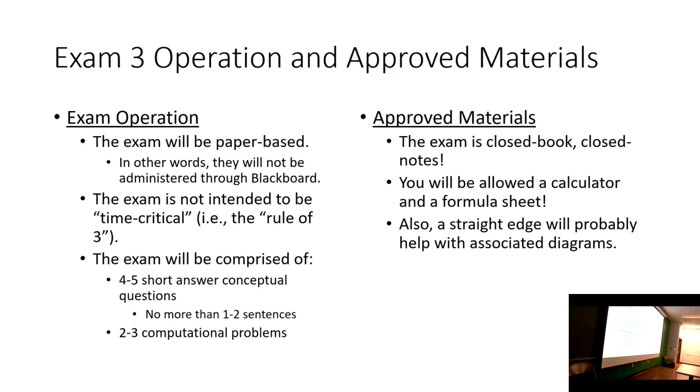Now, I want to make sure, and I'm really hammering this in about formula sheets, because we had a couple students on the last exam that didn't quite follow this, and I didn't make a big deal out of it, but I really want to enforce this now. You can bring a formula sheet, you can put whatever you want on it with the following stipulations, and the last one is the one I really want to talk about here.

First off, make sure you have your name on it, because I'm going to collect them all after the exam. You do not need to copy down necessary property tables, and I'll show you what I mean. For example, this table I'm giving you on the exam. I'm giving it to you, so you do not need to waste time on your formula sheet with this, because I'm actually giving you this table on the last page of the exam.

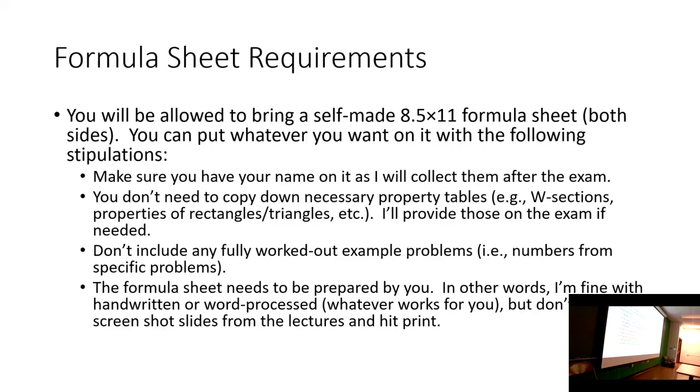Don't include any fully worked out problems. That really wasn't a big deal, but this last one is probably the one I really want to focus on. I want you to make the formula sheet. We had a few of you that just took the slides, snapped them into a Word document and hit print. It needs to be prepared by you. I don't care if you word process it, I don't care if you snap an image here and there from the slideshow, but actually take the time and make it, synthesize the information into something that makes sense for you.

Okay, let's talk about the topics on the exam. Really, this is it. This is it in a nutshell.

As I mentioned, my exams are not intended to be comprehensive—the first 3 exams in the class are not. In order to solve a truss or draw a shear and moment diagram, you do need to be able to compute support reactions, and I know that was on a previous exam. There's no real way of getting around that. But I'm not going through particle statics or R cross F or anything like that, because we haven't talked about that since the second exam.

What I want you to be able to do on this exam—first off, let's talk about centroids. Make sure that you can locate the centroid of a line, an area, or a volume. That's pretty much it in a nutshell. And make sure that you can compute the moment of inertia. If you can do those two, you're rocking and rolling.

You're good to go. I'll go ahead and tell you, because I'm sure I'll get this question during the review session: I am not going to make you break out the integrals and start deriving formulas for shapes. I'm not going to make you do that, so don't worry about it. That doesn't mean you don't need to be able to use the references you see here, but I'm not going to make you do the calculus-based derivation. I'll go ahead and tell you right now, I'm not going to worry about it.

The other main topic we've been talking about for the past few lectures is the analysis of structures. We've really been focused on two classes of structures: the first are trusses and the second are beams. Now for either of those, you do need to be able to compute support reactions. You can't analyze a truss or draw a shear and moment diagram without being able to compute a support reaction. So you do need to be able to do that.

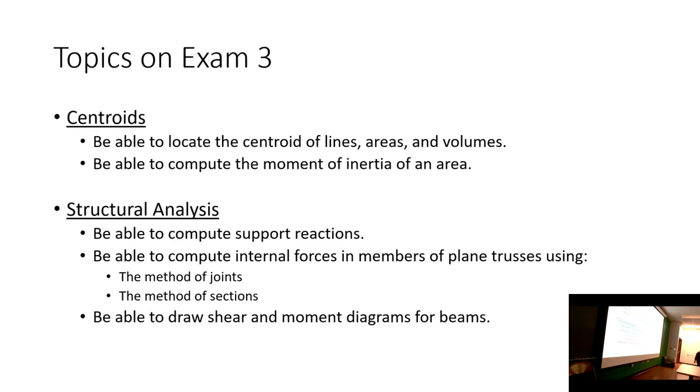And finally, be able to draw shear and moment diagrams. If you can do all that, you're good on exam 3. Now, in terms of the concepts...

We do know that, so I am going to ask you conceptual questions. Make sure that you understand that if we integrate a region, we get an area, but if we integrate x times a region, that is the first moment of area, or x squared, that's the second moment of area, and so on and so forth. The second moment of area has a very special name—we call that the moment of inertia.

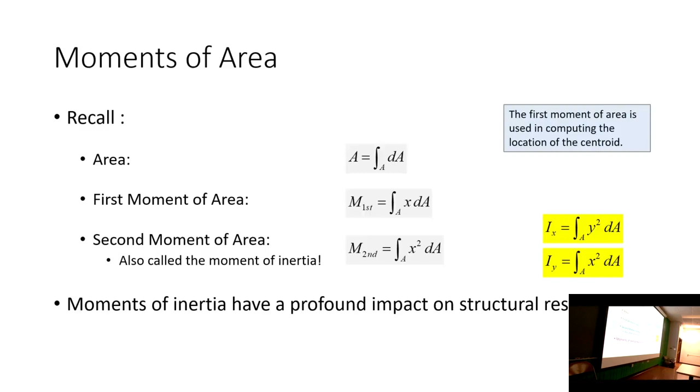And remember the subscripts are flipped—that's not a mistake, that's on purpose, because the distance from the x-axis is called y, and the distance from the y-axis is called x. The first moment of area is useful in computing the location of the centroid, because if you take this integral and divide it by the area, that tells you where x bar is.

You do need to be able to use these. Okay, so I'm going to give you this right here—I'm giving you this on the exam. This table right here, so it's the last page on the exam. This list isn't complete; you have a more comprehensive list in your textbook and in the FE reference manual, but I'll go ahead and tell you, you're not going to get asked any centroid questions beyond what's on this.

I do not want you to waste time on your formula sheet littering it with stuff like this and stuff like this. Any of these formulas that you need, you will have. Okay, point blank.

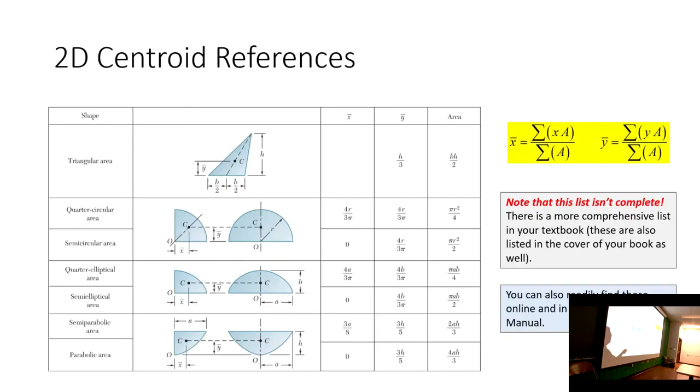But you do need to make sure that you understand how to use them, and by use them, I mean understand how to compute the centroid of an area, or the centroid of a volume, or the centroid of a line segment. You do need to be able to compute the moment of inertia of a composite shape.

And so in order to do that, we utilize the parallel axis theorem. The parallel axis theorem states that if I want the moment of inertia of a composite shape, I sum up these terms for all the simple shapes, and these terms are the centroidal moment of inertia of each simple shape plus A D squared.

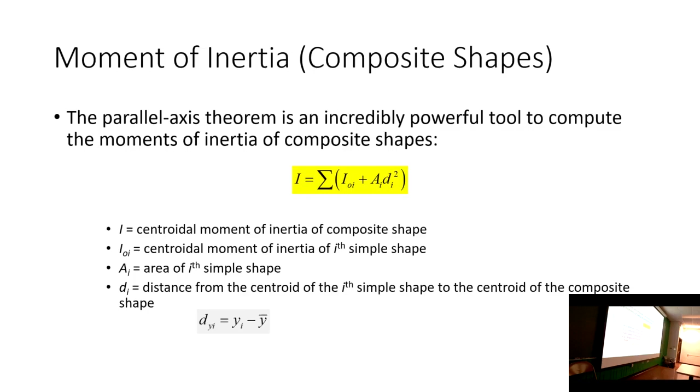A being the area of that shape, and D being the distance from the centroid of that simple shape to the centroid of the whole thing. That one's really easy to compute because you just take y minus y bar for the shape in question. So it's just a big algorithm, but I don't think it should be that difficult, it just takes a little bit of time.

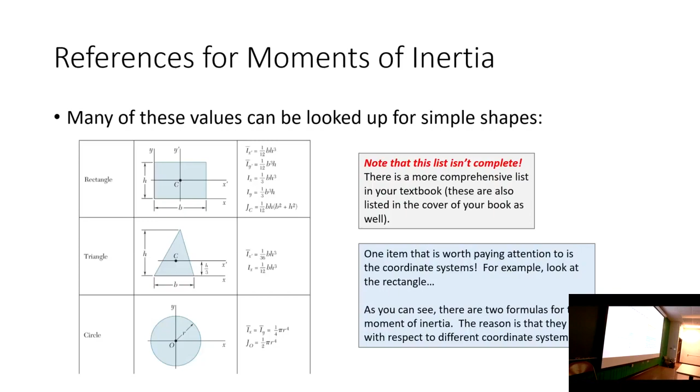If you need these formulas, I will give them to you. There's a page in the back of the exam that has a host of reference formulas like that you'll need on the exam.

For truss analysis, we have the method of joints and the method of sections. The method of joints is a concurrent force system problem, meaning all the forces meet at a common point. So you're only afforded two equations of equilibrium when assessing a joint, meaning you can only solve joints where there are at most two unknowns.

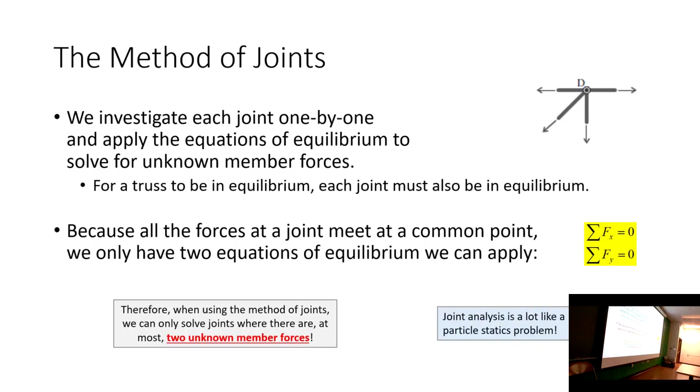Whereas with the method of sections, you can cut a section that has at most three unknown member forces, because now we have a non-concurrent force system, which gives us a third equation of equilibrium we can use to solve these members. The method of sections is more advantageous for spot checking or determining forces in a given member, whereas the method of joints will help you with the whole truss.

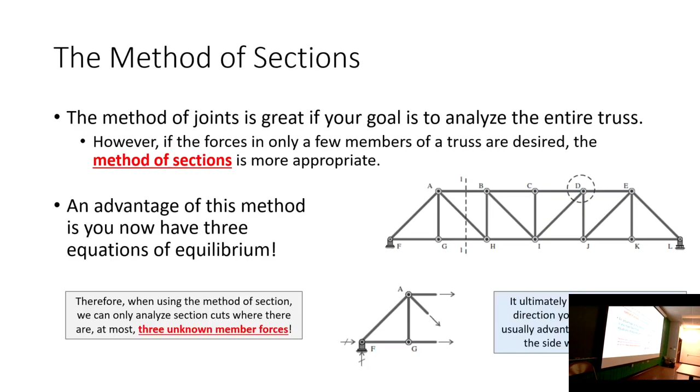Finally, we have our shear and moment relationships. We know that the relationship between load, shears, and moments can be defined from a differential or integral basis. So if I have the load diagram and integrate it, I get the shear diagram. And if I have the shear diagram and integrate that, I get the moment diagram.

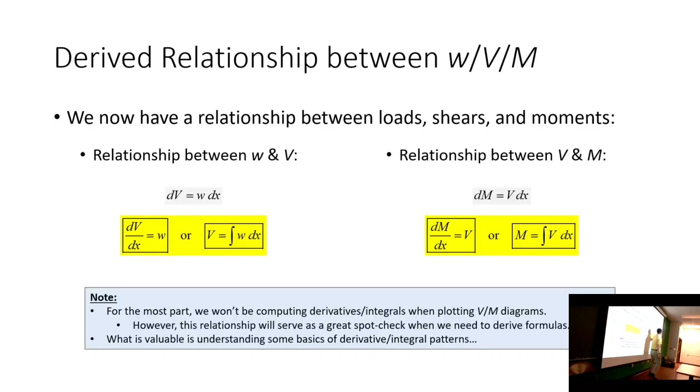But probably what's more useful to us as engineers are the conclusions from our graphical approach. When we have our load diagram, the first thing we need to do is construct the shear diagram. At any given point, the slope on the shear diagram equals whatever the load is. So if we have a beam with a bunch of point loads, the shear diagram looks like a big stair step, because between the point loads there is no load, so the slope of the shear diagram is 0 - that's why it's just a bunch of horizontal lines like a stair step.

Between two points, the change in shear is equal to the magnitude of load between those two points. That's another reason we had a stair step approach for point loads - between those two loads there's nothing on the beam, so there's no change in shear.

Between shear and moment, you've got to integrate the shear diagram to construct the moment diagram. For the beams we're looking at here, we're largely just using a graphical approach - our shear diagram is just a bunch of rectangles, triangles, and maybe some trapezoids, so we don't need to break out the integrals to compute the area under the shear diagram because the shapes are pretty easy.

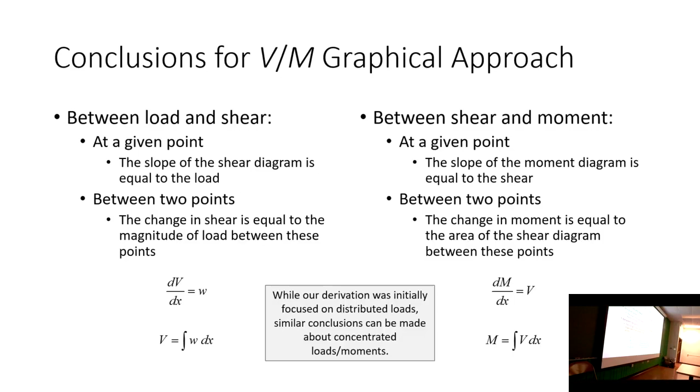Keep in mind that the slope of the moment diagram is equal to the shear at any given point, and between any two points, the change in moment is the area of the shear diagram. That's where we had derived these graphical relationships.

This is what we have for concentrated forces. Whenever you're drawing the shear and moment diagram and you have a concentrated force, that force is going to cause a jump in your shear diagram. So you had a shear here and you jump to another shear, and the magnitude of that jump is equal to the magnitude of that load.

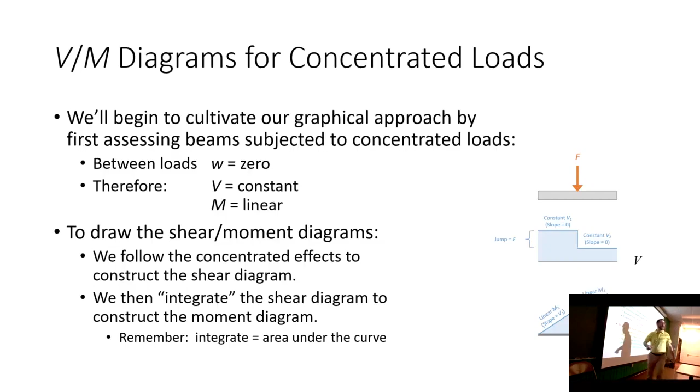You have two shear diagram regions of 0 slope because there's no load there. But we have a constant shear here and here, so a constant slope here and here - that's why we go from constant to linear, and that's why we have a slope change right where the load is, because we have a value change on the shear diagram. For distributed loads, we go one level higher.

So if we go from load to constant to linear, now we go from load to linear to parabolic. We have our constant load, and that constant value determines the constant slope of the shear diagram, so we have a linear shear diagram. We go from a high shear region to a low shear region in this example, so we go from a high slope region to a low slope region on the moment diagram. That total change in moment between those two points is equal to the area under the shear diagram curve.

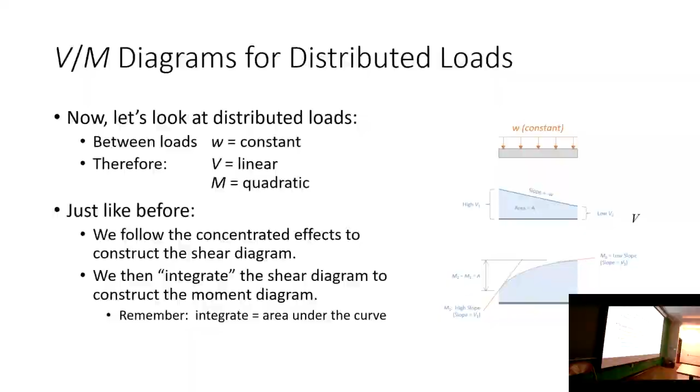And that's exam 3. Okay, so with that, I'm going to stop for a sec and see if you all have any questions. I made a post on Teams yesterday, and I said come prepared with questions. So with that, the floor is yours. What questions do you have for exam 3?

Are you ready to just get this thing over with? Are a lot of people ready to do that? Let me ask you this: is there any one topic of these three that you feel least sure about? Trusses, beams, or centroids? Which one are you feeling the most fuzzy about? I'm curious, and if so, why?

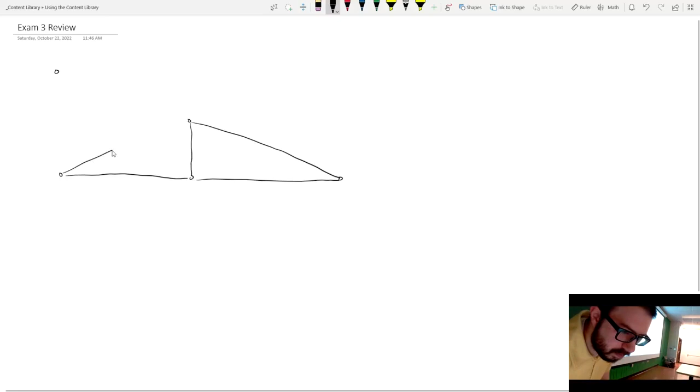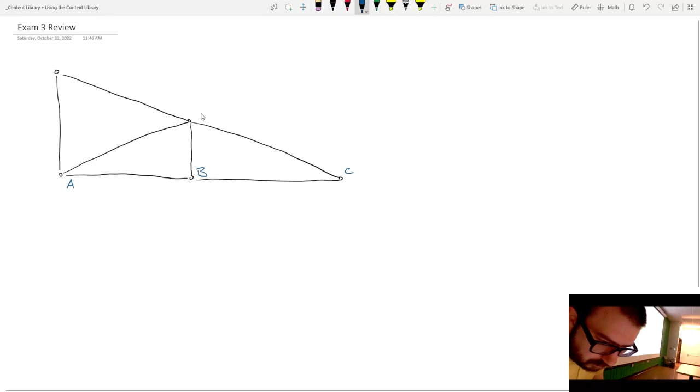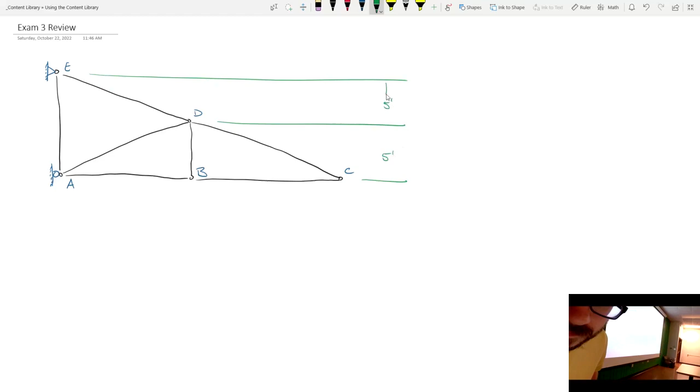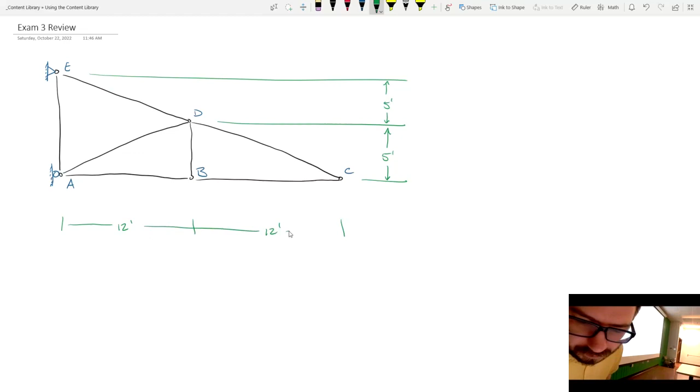So I have a truss here that looks like this, and we're going to say that that's 5 feet, and this is 12 feet. This truss has 10 kips of applied load on these two joints, and the question is to solve the truss.

First thing I'm going to do is move this over a little bit. So we're going to solve this truss, and I'm going to show you maybe a different way. Let me be clear, I don't think this is all that different — I think we're still using the method of joints like before, but maybe organizing it a little differently.

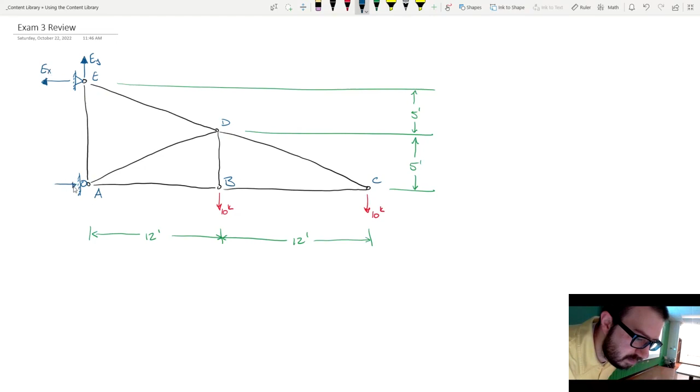This truss is cantilevered, so we've got reactions going this way and up and down. First I'm going to recognize the direction of my reactions. Because this is cantilevered, the order in which we solve for our reactions is going to be a little different. I'm going to call this EY, this EX, and this AX.

Now I want to say something right now. If you look at this truss and think, okay, the only unknowns in the horizontal are these two, so they must be zero — I want you to stick out your hand and stop, because that's wrong. These two do not equal zero; their sum equals zero. They could very easily have value, and in fact they do in this problem. I'll show you what I mean here in a second.

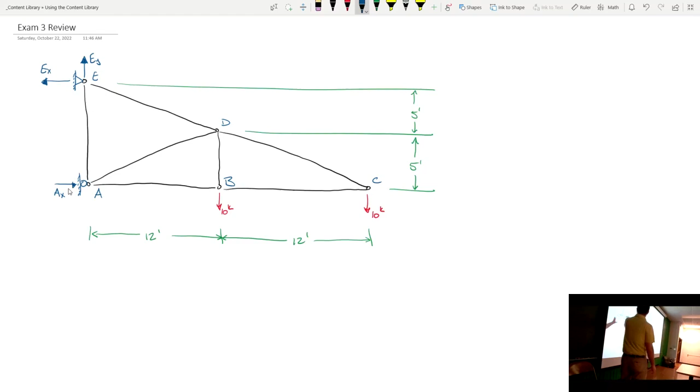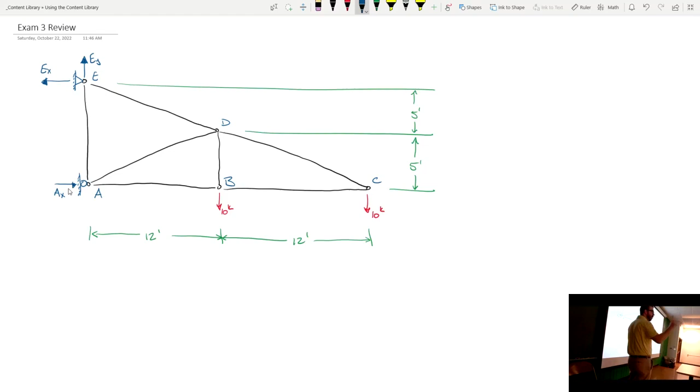Going back to my equations of equilibrium, the first thing we need to do is compute support reactions. Which one do I compute first? Well, how many unknowns do I have in the horizontal direction? How many unknowns do I have in the vertical? Why don't I sum forces in the vertical direction first?

So we have EY going up, 10 down, 10 down. I get that.

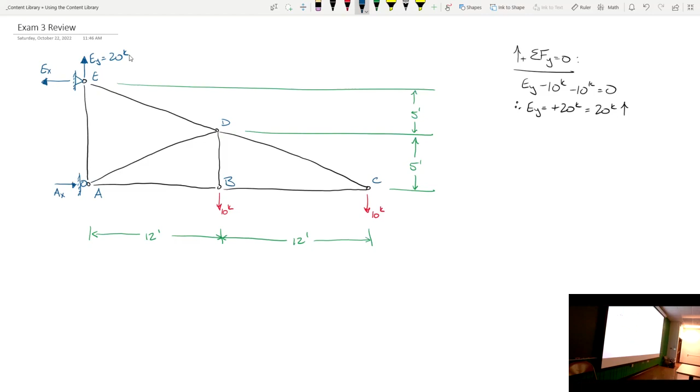Now, some of you are probably thinking as we go through this: how in the heck did Dr. Mike look at these reactions and see that one's going left and one's going right? You're going to see here in a second. Again, you could assume they're both in the same direction and just let the math work itself out. There's no magic to getting the assumptions right or wrong — it doesn't really matter.

Now I'm going to let you drive the train a little bit — you tell me what to do next. I have some forces in the y direction, now what? Some moments — where would you like me to sum moments? E. Let's sum moments at E. We have two reactions going right through joint E, which will make our life a little easier. So let's sum moments at E.

All right, let's sum moments at E. Do I need to consider EX or EY? No, okay. What about AX? Does AX contribute moment to E? Yes, okay. In what direction?

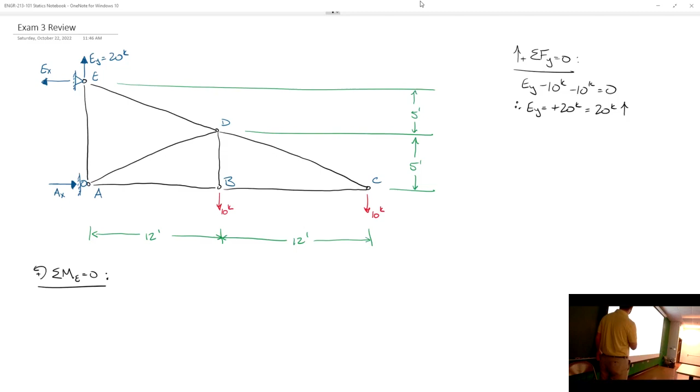Is this a positive moment or negative moment? Positive. And what is my moment arm from E? 10 feet, okay. So plus AX times 10 feet. Let me erase that.

All right, what about these two? Did they generate positive moment or negative moment at E? Negative moment, okay. So it's going to be negative 10 kips times something minus 10 kips times something.

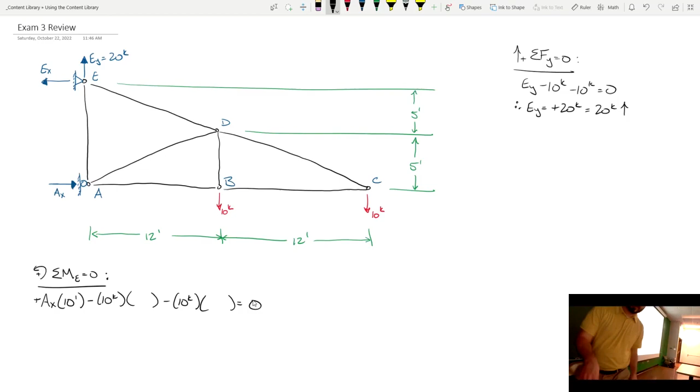What are those moment arms from E? How far is it from E to the line of action of this force? 12 feet. And for this one, it's what? 24. So AX times 10 feet minus 120 minus 240 equals 0. So AX times 10 feet equals 360.

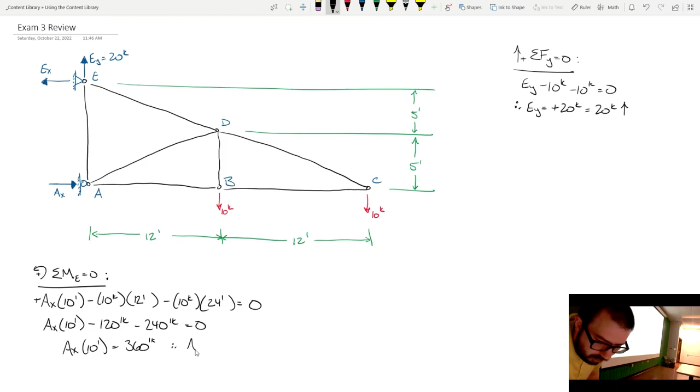So that's going to be 36 kips to the right. And if this is 36 kips to the right, what is that? 36 to the left. So what I'll do is that, and then we have that pointing to the left because we made an assumption that EX was pointing to the left and we got a positive answer. Okay, so let me write that up here.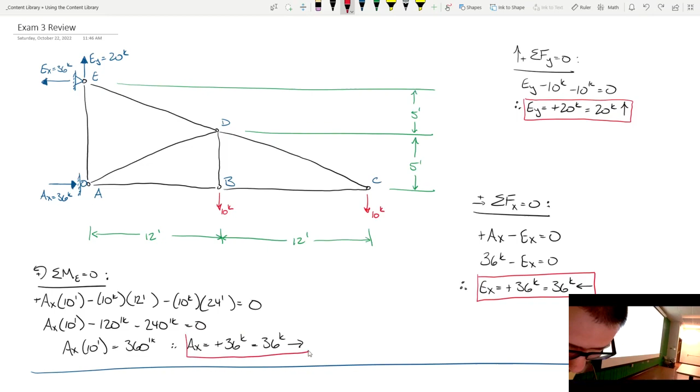Okay, now I'm going to take a second before we move on. I want to make sure this part makes sense. I don't want this to be an area of confusion on the exam. I don't care if it's trusses or beams, whatever—you need to be able to compute the support reactions of a structure. Is there anything about this that was confusing? Okay with this? All right.

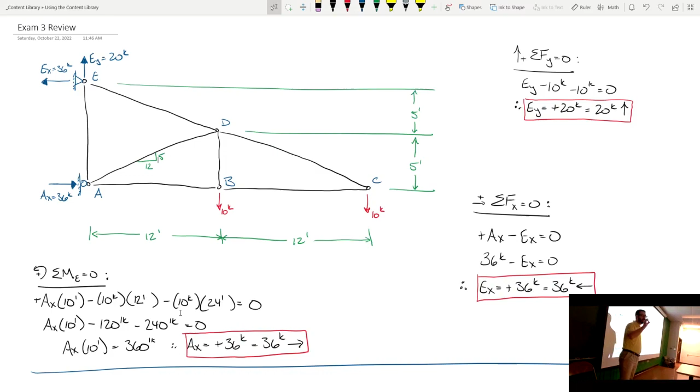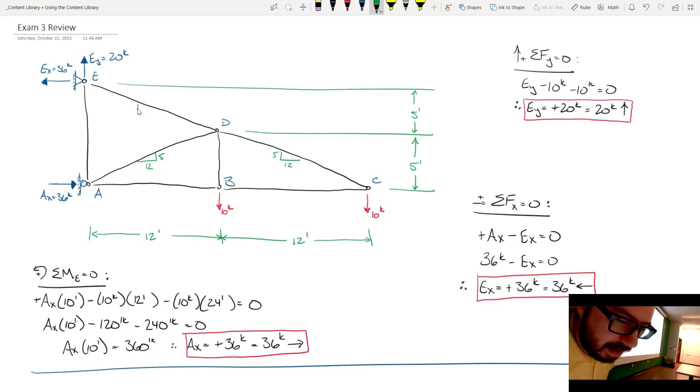Now, before we move on to actually doing the method of joints, is everybody okay with identifying that these diagonals are at a 12 to 5 slope ratio? Is everybody okay with that? Now, just for sake of discussion, if this is 5 and that's 12, anybody know what the hypotenuse is? 13. This is a 5, 12, 13 triangle. 5, 12, 13s are special, just like 3, 4, 5s. 8, 15, and 17—that's another one. So, in fact, all of these are at 5 to 12 slope ratios. Does that make sense?

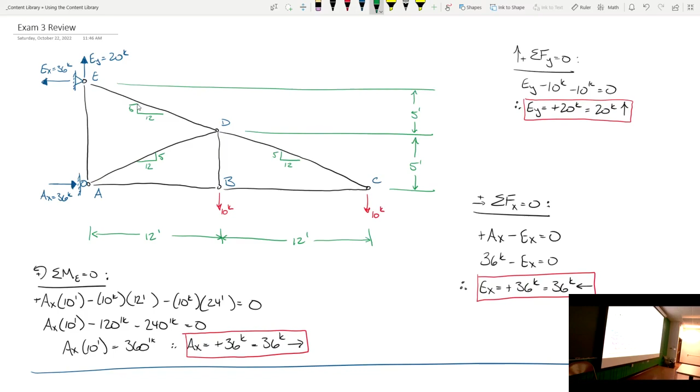All right, now I'm going to give this a sec because I'm going to scroll down here in a bit. Before I do, does everybody have this drawn out? Okay. Hold on, there we go. That's a little better—I needed something on the screen for it to want me to scroll down. Pen cord doesn't like me.

All right, now what I'm going to do for the method of joints for this truss is I'm going to try and do it all at once. And this might be a way of making these problems a little easier for you, okay? Let me explain what I mean. Let's do that, that. So what I've got is I've sort of got the entire truss drawn out right here. And I'm going to sort of do this.

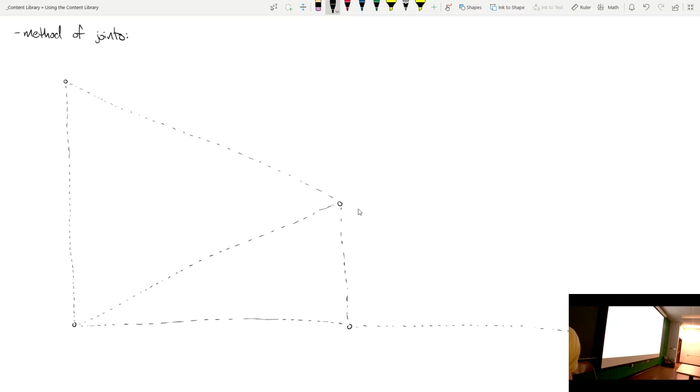How many of you thought when you decided to major in engineering that there'd be so much drawing? That was a joke—not very funny.

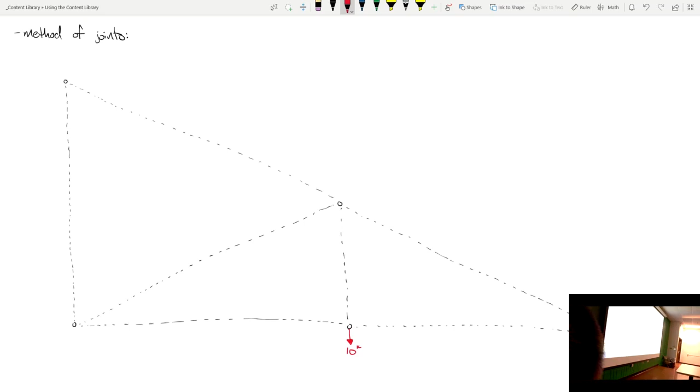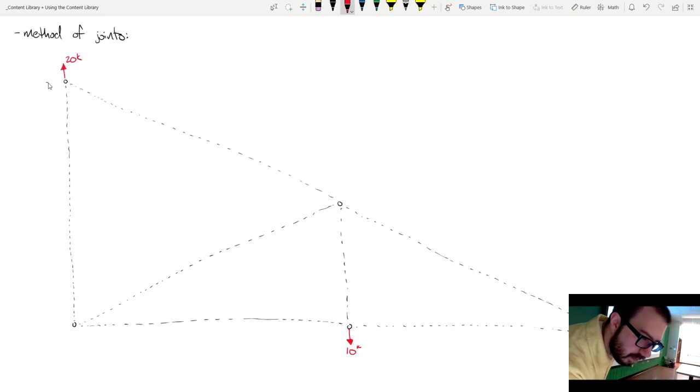Okay, all right. So what I've got is I've got the entire truss drawn out, but I kind of exploded it a little bit. Now what I'm going to do is take a second and draw the forces that I know. I know that this is 10 kips. This is 10 kips. I know that this is 20 kips. I know that this is 36 kips, and I know that this is 36 kips. Okay? Now all of my diagonals are at a 5 to 12.

Okay, so let's see if we can start solving some members or solving some joints. Can I go ahead and solve this joint right now? No, why? There's too many unknowns, right? I've got 4 members, right?

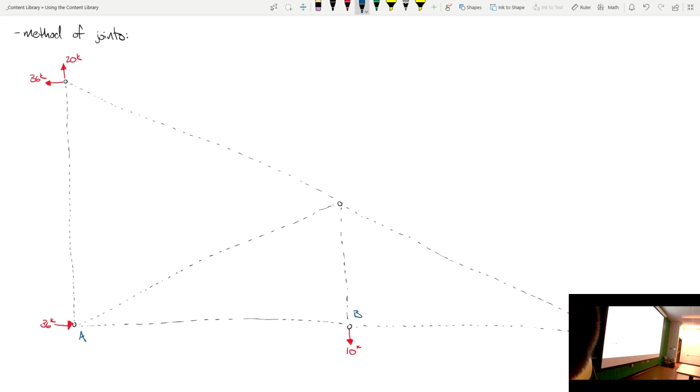So if I start labeling these, let's put some letters on this so we can kind of speak the same language. So this is A, B, C, D, and E. There's only 2 joints I can start with right now. Which ones are they? I could start with joint C. What's another one I can start with? Well, I can't start with A—A has 1, 2, 3 members, right? I could start here or here. This kind of seems easier, I don't know about you. I'm kind of lazy, so let's do this one first. So let's put my members. Put my member. So there's my members.

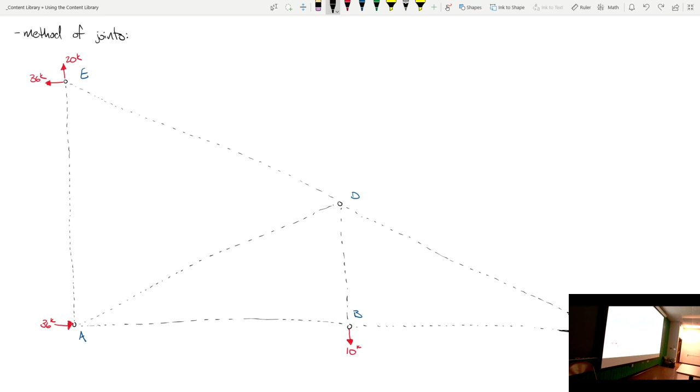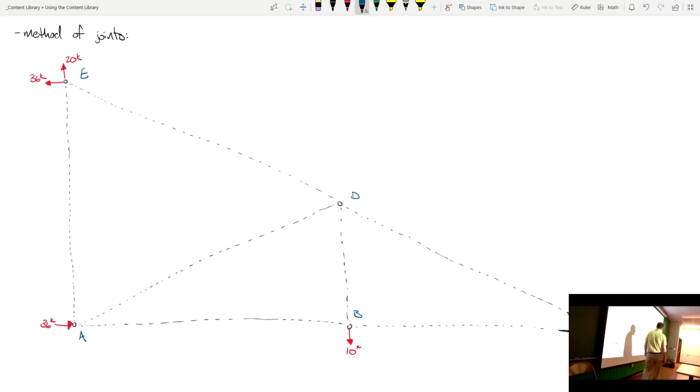All right, so if I've got 10 down, what does that mean? 10 down means I got to have how much going up? 10 up, right? This diagonal here is going to have a horizontal and vertical component, so that's got to be 10.

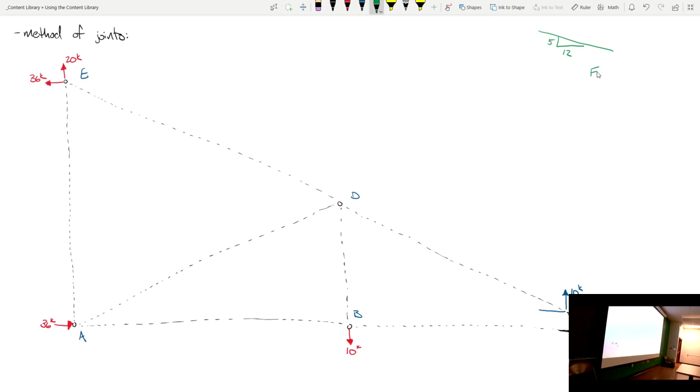Now, if I have a vertical component, I can immediately go through and determine the horizontal component, right? These members are at a 5 to 12 slope ratio. So the x component is to 12 as the y component is to 5, for all of these truss members.

So what that means is if I have the vertical component, the x component is 12/5 of the y component, or the y component is 5/12 of the x component. In other words, in this case, the horizontal component should be larger. So if this is 10 kips, what is that? Break out the Casio FX115 ES Plus or similar scientific calculator and tell me what that is right here.

24. Which way is it pointing? To the left or to the right? To the left, right? Remember, you have a diagonal member, either they both point away or they both point towards, okay?

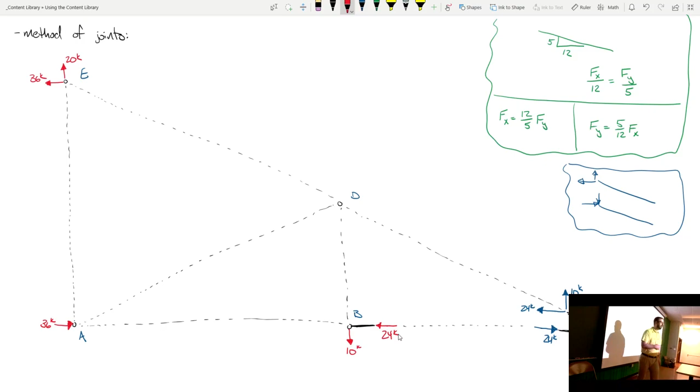Let's look at the horizontal member BC. If this is 24 kips to the right over here, that means whenever I decide to do this joint, that's 24 kips to the left. Remember, on the other joint, you flip the direction. Same thing with this member right here, okay?

Whenever I decide to solve this joint, I know that this is 24 and that is 10. Make sense?

Okay, let me ask you this. Can I solve joint D right now? You tell me. This is joint D. You said no. Why'd you say no? 3 unknowns. Well, what about joint B? Can I solve this one?

Yes. On joint B, why didn't we flip the directions of 24? Oh, because I did it incorrectly. Okay, that's why. It's exactly why. I screwed up. We'll add a quarter to the mistake counter.

You're right. That is supposed to be down like that, because I must have gotten decaf this morning. That's why. You're 100% right. Yeah, this is 10 up. So that's 10 down. That's 24 to the left, 24 to the right. Whoops.

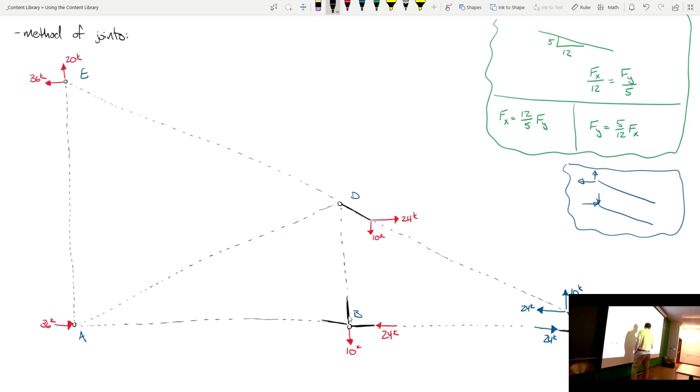Because if I have 10 kips going down, what's this? 10 up, and what about this one? It's 24. What direction? There we go. So this—

So now let's go ahead and transfer these. And this time I'm going to get my signs right. I'm going to not blame my coffee this time. So this vertical member, if that's 10 up, 10 down, okay? And this AB, I know that member, 24 kips going this way.

Okay, all right. Now, before we move on, I want to take a step back and see, does everybody kind of understand what I'm doing so far? Is this making it maybe a little less tedious, that we're kind of doing it all at once? Kind of like a puzzle, isn't it?

A big puzzle. Okay, now, can we theoretically go ahead and solve joint A? Could we theoretically solve joint E? What about joint D? Could we go ahead and solve joint D? Theoretically, yes, okay? I want to give you a word of warning, though.

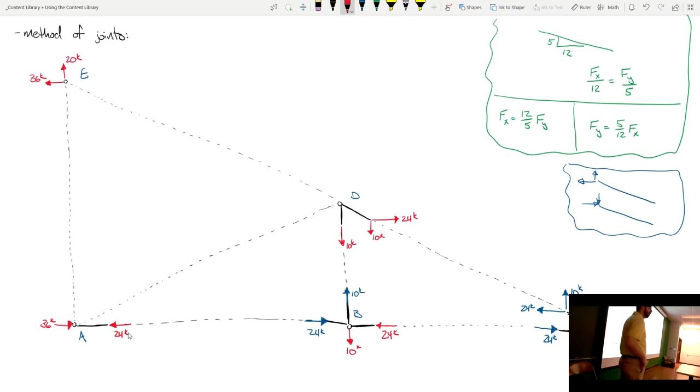So honestly, I would probably go to either joint A or joint E, because we don't need to solve joint D right now. So help me out. Which joint would you like to do, A or E? Just pick one. A. All right, let's do A. Okay?

So joint A says we've got that member right here, that member right here. We have a vertical component here, vertical and horizontal. So tell me which one to deal with first, the verticals or the horizontal. Tell me what to do. Which should I solve for first? Horizontal. So what is it?

I got 36 going this way, 24 going this way. What is that? 12 kips to the left. Kips to the left.

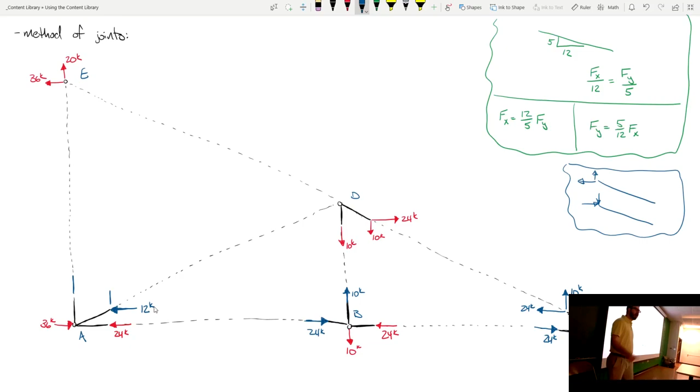Now, if that's 12 kips to the left, which way is the vertical component facing? Up or down? Down. And how much is it? 5, 5 kips. And if that's 5 down, that makes this 5 up, doesn't it? All right, now let's transfer these to our other joints.

Wait, oops, sorry, didn't mean to do that one just yet. Okay.

Now, which joint would you like to look at, E or D? Doesn't matter. Somebody pick one. E. All right, let's do E.

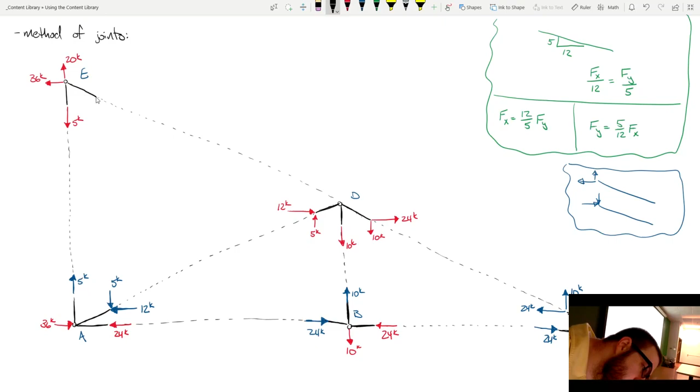Now what happens at joint E is kind of cool because we only have one member that we're solving for. Let's solve for each of these independently. Let's deal with the x-axis. If I've got 36 to the left, that means I've got to have 36 to the right. And if I have 20 up and 5 down, I need another 15 going down, right?

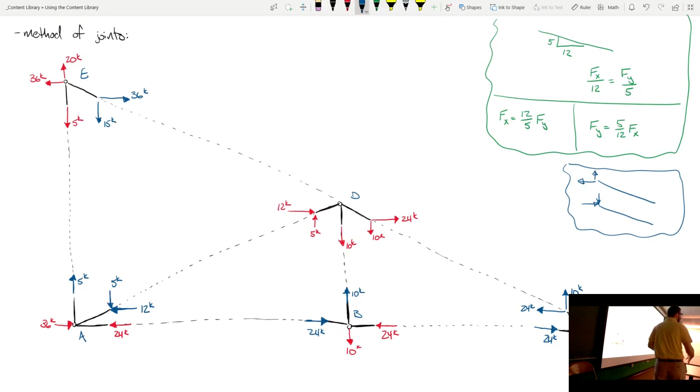But watch this, what is 36 divided by 15? 12 over 5. Independently managing each of these, they align with the slope ratio, so it's a check that what you're doing is correct. Also, looking at each of these independently, we found that this is to the right and this is down. It wouldn't make a lot of sense if we had one going to the right and one going up. They both either have to align with tension or they both have to align with compression.

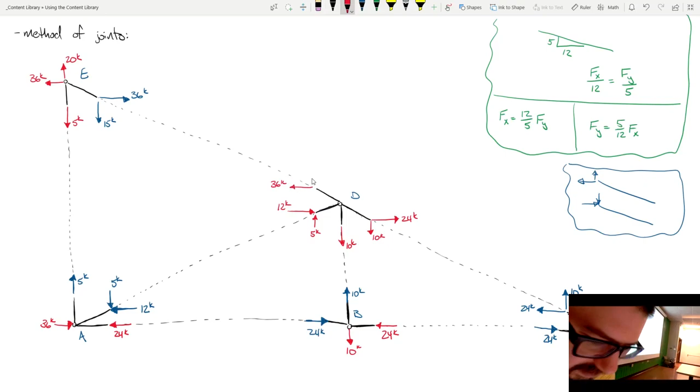And they did. Okay, now if you really want to get fancy, if you go to joint D and say, okay, let's take a look at joint D. So at joint D, we have this 36, this 15. Just take a look at joint D.

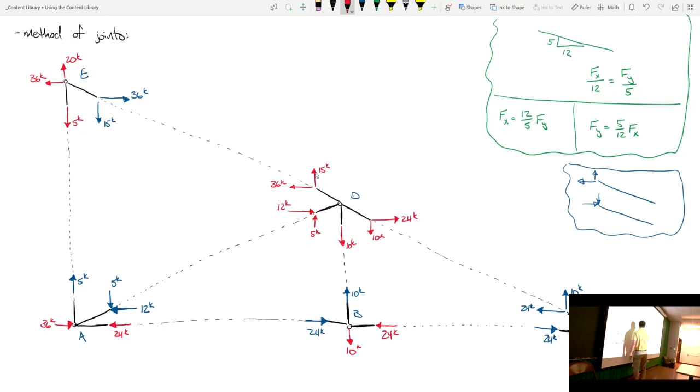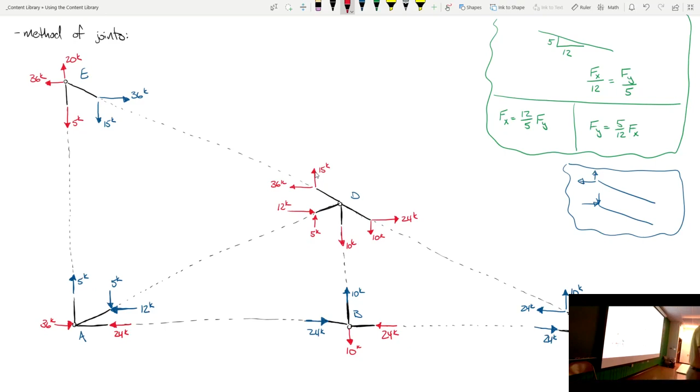What do we got going on? Let's talk about horizontally: 36 to the left, 12, 24, 36 to the right. What about vertical? 15 and 5 going up, 10 and 10 going down. 20 up, 20 down, 36 left, 36 right. So that joint is in equilibrium.

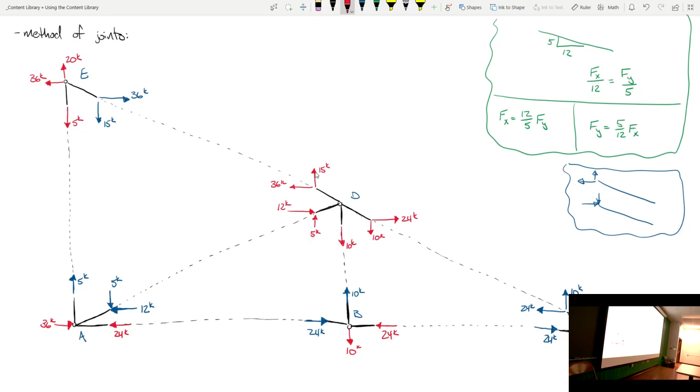And then, now that we have the entire truss right here, we can handle this final answer really easily. So check this out. Let's look at this member. Is this member in compression or tension?

Say it again. No, both of these forces are going to the joint. You have a bar in your hand and you're pressing it - the bar is pressing against you, right? Here's the truss member, here's my hands, I'm pushing it in compression. The bar is pushing towards the joint. That member's in compression. Does that make sense?

Does that make sense? That member's 24 kips in compression. Okay, this member right here, also.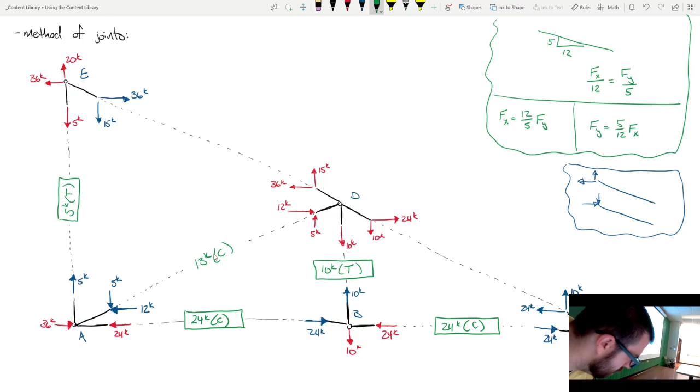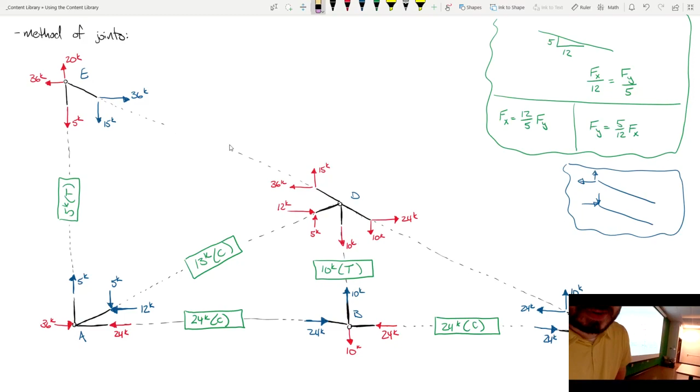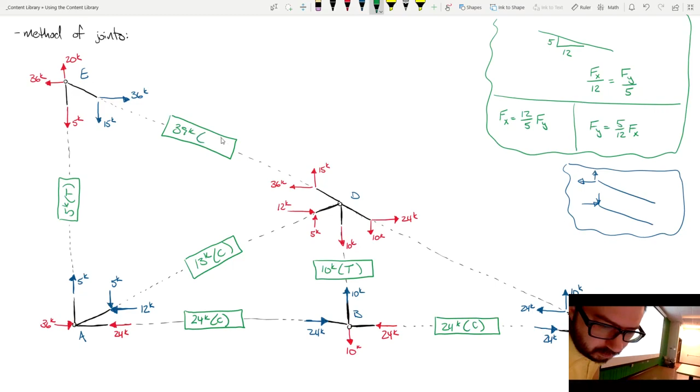What about this member up here, member DE? What is that? What's the magnitude going to be? 39. Do I have a second on that? All right, 39 kips. Tension or compression? Tension, all right.

And I'm curious if anybody can do a little bit of mental math and tell me what this one's going to be. And that one's also in tension. Boom, truss solved. That's a long truss, I'll level with you.

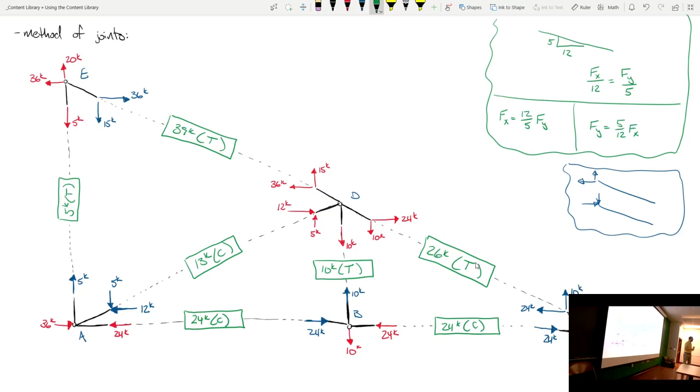I took probably - another thing I mentioned - I took longer than I would probably do myself because I'm sitting here explaining it to you. But this is basically the same process as the method of joints. I'm just doing it all in one space as opposed to segregating it. It also might be a little easier to track the arrows because they're all there. I also tried to be pretty color coordinated that with any joint, the red forces were the ones that I knew going into it, and the blue forces were the unknowns before we started.

Does that make you feel better for the... Keep in mind, this is also in the class notebook as well, so it's under exam 3 review.